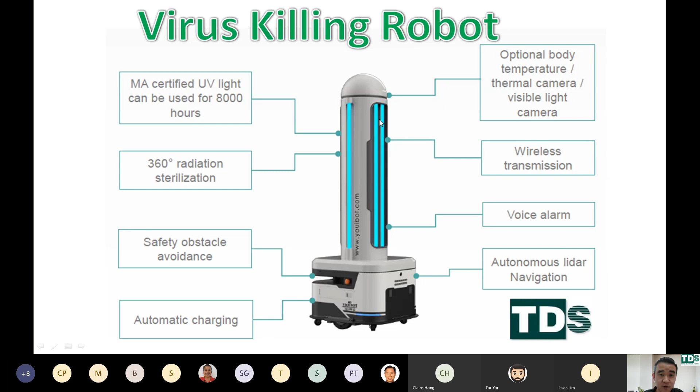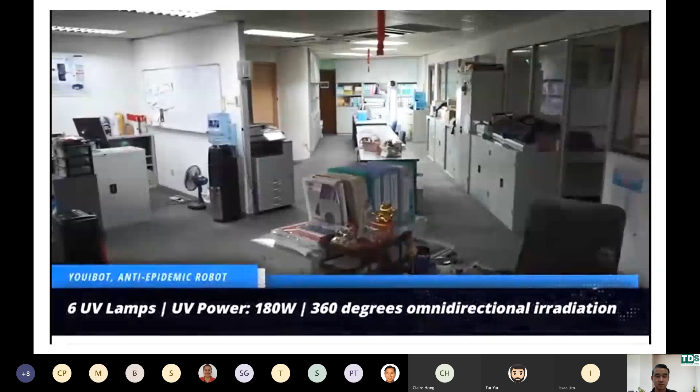UVC is a proven disinfectant against the COVID-19 virus. Introducing Youibot, an anti-epidemic robot. Disinfecting your office after hours without the need for human supervision. Scanning temperature of employees during office hours. With 6 UV lamps and a UV power of 180 watts, Youibot does 360 degree omnidirectional irradiation. Using shortwave UVC, Youibot is capable of destroying viruses' DNA and RNA in just minutes. Contact us for more information.

Flexy is a remote access device with data communication. It helps you connect your industrial equipment, collect the data, and send it to your IoT application through the internet - not only in your local network, but anytime, anywhere, because it's a remote connection through our Talk2M cloud, securely.

So where is VPN? In this example, you are in the office. You can connect to your HMI or PLC from your PC, tablet, or mobile directly because you are in the same network, same place.

If you are not in the same network as your HMI or PLC - let's say you are overseas, at home, or at a branch office - you cannot connect to your HMI and PLC, the devices in your local office. So VPN is the solution for that.

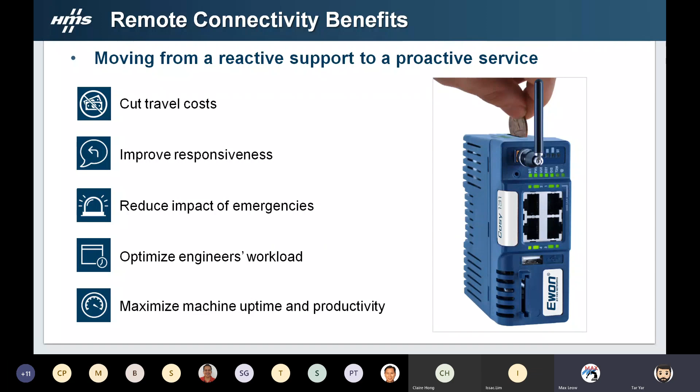Flexy includes a full VPN connectivity solution with the Talk2M VPN service. When we talk about VPN, remote access, or cloud, we understand that security is the main concern. Security is our first priority.

For this, Talk2M security is regularly audited and certified by third-party organizations. We have ISO certification, which shows that Talk2M is managed properly by HMS, in a very professional and secure way.

The Ewon gateway establishes a secure outbound connection through TCP port 443, which is the same port that you might use to check your bank account or your emails.

Therefore, no firewall setting is required to change, because this port is usually already open in the firewall.

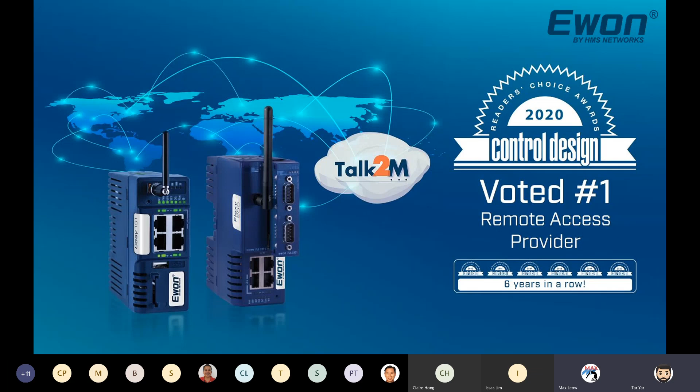To summarize, Flexy is a VPN router for remote access. So all the features that I have mentioned here before can be used anytime, anywhere, not only in your local network or local office. And lastly, we are proud to mention that Ewon devices are award-winning and certified remote access devices in the world.

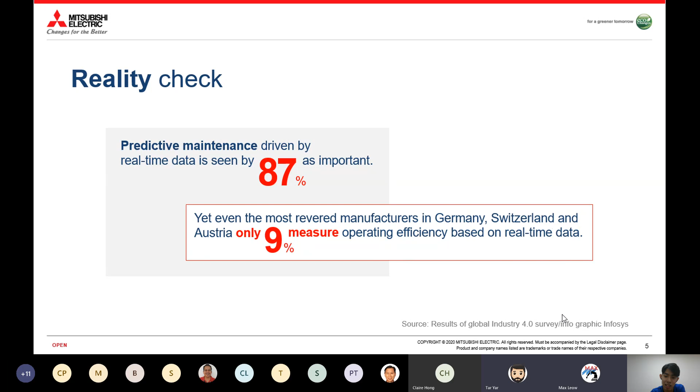For predictive maintenance, statistics also show that 87% of people think real-time data is very important, but only 9% can actually collect and manage real-time data on their factory floor. This data is from Central Europe, and even in Japan, there is less than 30% of manufacturers who can really see what is happening in their factory in real time.

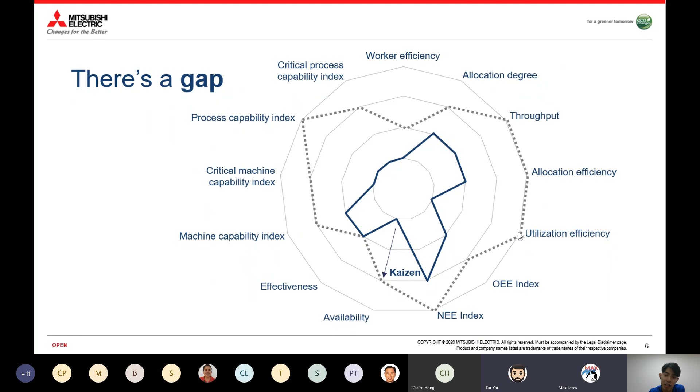From this circle chart here, we can see that the solid line is actually the reality, and the dotted line is the expectation. There was always a very big gap between where we are and where we want to get. The shift from reality towards our expectation has to be done step by step. Various aspects have to be considered when putting in this program, in terms of how we can increase the throughput, how we improve the OEE, and how we can improve efficiencies.

Let us go through some struggles from our customers. These are some of our real case studies previously. Firstly, some of our customers previously always said that they want to build a new Industry 4.0 production line.

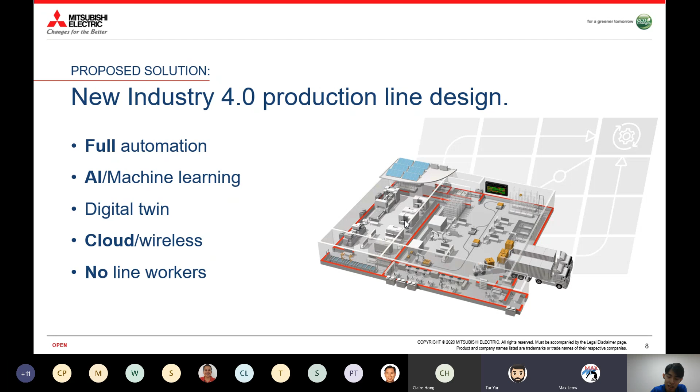They always come up with terms like they want to build a full automation production line with AI, machine learning, digital twins, cloud computing technology. They are making a lot of bombastic terms. And to tell you the truth, when all this technology is implemented, there will always be a lot of problems, and those proposals will be rejected.

Why? It's because there is very high cost and low ROI. It probably takes 3 to 5 times what the boss was predicting, and it's a very tough job. The first time as a manager, he's talking to a lot of people he has never talked with before, and he needs to speak with IT vendors for software, cloud computing, networking, data scientists, and all of that actually costs a lot.

It's reasonable, but very difficult. If you look at a production line that's extremely complex, the calculation of ROI is also very, very difficult. How much can we really expect if we implement this improvement plan? So at the end, everything gets rejected.

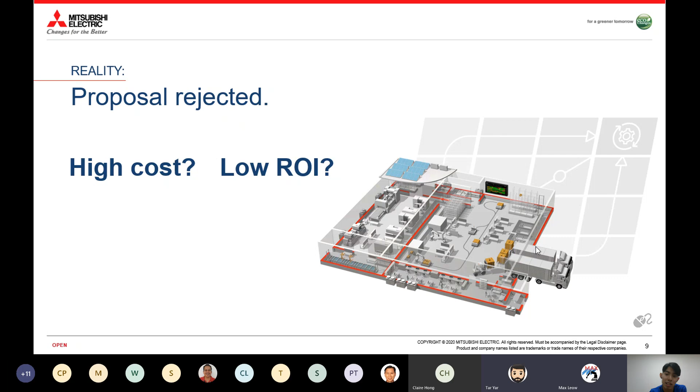Then another case study is where the manager ordered the factory staff to do a data analytics project using AI. So when the factory started working on the injection machine lines, which had a lot of quality issues, they needed to monitor the characteristics of machines like temperature, electric currents, and motor data, to see when the machine is going bad and starting to produce bad quality parts.

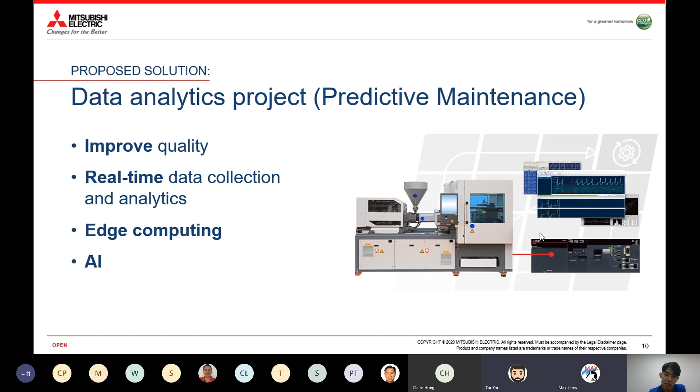They put an edge computer on the machines to collect data in real time. As it is a very fast machine, they gathered a lot of data, a huge database being collected, and they hired a data scientist on a project basis to see if they could use the data to find out what the problem was. So the data scientists looked at the data, tried to find some correlation, tried to find some trend, and did some testing with the actual machine.

At the end, they can only predict 50% of the time when the machine would fail. But 50% prediction is considered quite low, which means another 50% they can't really predict the failure, and it will cause the failed product being manufactured. So at the end, this kind of accuracy of prediction is not good.

And they spend a few months, 3 to 6 months on this project using a lot of money. Then they need to start again to collect more data to improve the accuracy. And the next result is only 10% improvement. So overall, it's only 60% prediction rate. With this prediction rate, it's actually not doing much improvement, but at the same time, it costs a lot of time of the engineers, the cost, and the salary for the data scientists.

So at the end, everything has to be ended, project postponed. Then they rather spend the costs for the engineer to improve the productivity using more traditional methods.

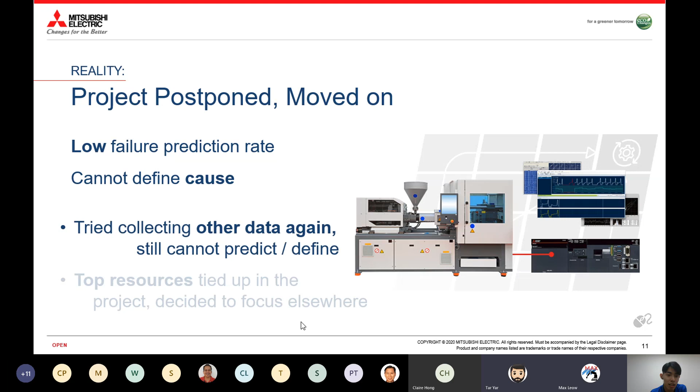And for this IIoT implementation, there are a lot of different failures. Everyone said that IoT is easy and compatible with all machinery, but factory automation is a very complicated process. It's easy to say you want to put an additional sensor as a counter, but where to put the sensor and how to wire it is not that easy. Programming is also required as well.

A lot of people start energy saving projects, but at the end, they just get all the nice screens with histograms, pie charts, but don't really save any energy. They just find out how much energy they are using, and the overall view is like a very sophisticated and bombastic visualization to feel that, wow, we are very advanced. And everyone talks about data analytics, but such cases as I told you, it's not magic.

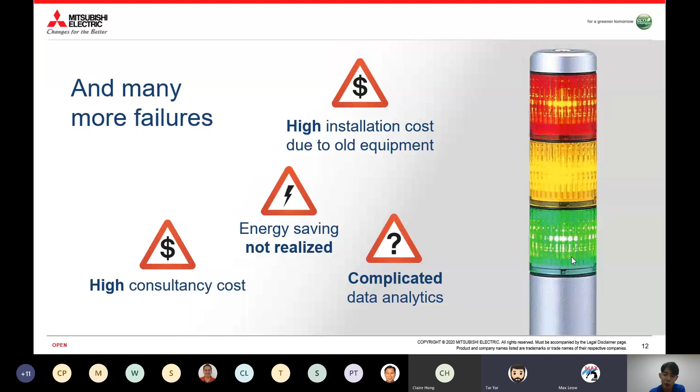We have been trying to solve this problem for ages and never got the answer. Just because you pay money for AI and a data scientist doesn't mean that you will get the return. So basically, these are the lessons learned throughout our experience dealing with different small SME corporations or even MNCs.

So we can dream big, but we always start small. I'm not saying that IIoT is a bad idea. We are firm believers of technology that it will change the way we produce things. And this is why our company has been continuing investing in IIoT e-factory for more than 17 years. And it is always important to dream big, to have a master idea of what you want to do in the future. And your factory will become what you dream of in a step-by-step manner.

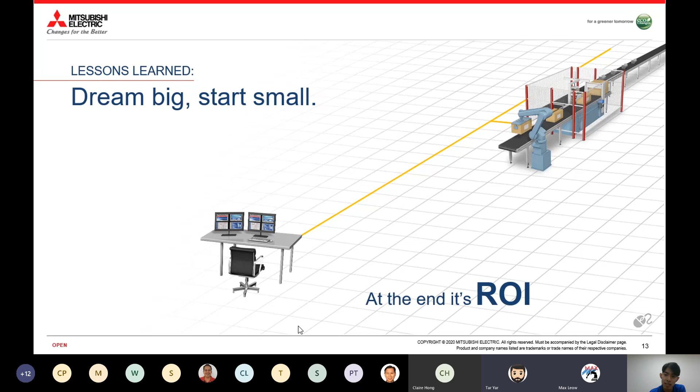So next, simple KPI. One thing that is also very important is to have everyone agree on the output of the IIoT project that you are working on. So many times I have seen management and engineers disagree on the result of a project. Sometimes the thing that management level sees and the engineer level sees is totally different.

Then when you start a project, always set a KPI that everyone agrees on and keep it very simple: where, what level, and what direction. Always make your objective clear so that you can set your direction and also prepare the necessary resources for it.

So I have talked a lot about IIoT, but next I would also show you SMKL, Smart Manufacturing Kaizen Level. This model is implemented and developed by Mitsubishi Electric in Japan, and it's the KPI we use for IIoT in manufacturing. This is not a shortcut for going straight to a totally perfect IoT or Industry 4.0 factory. Everything goes in steps, and this is the map that we use to guide us through.

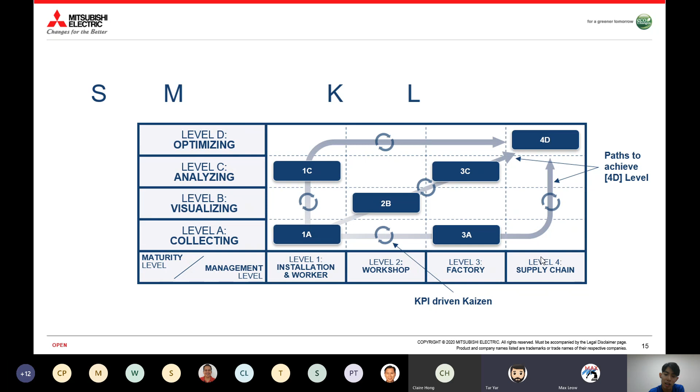And we have what we call Kaizen level and Kaizen areas. The Japanese word is actually 改善, and I will explain after this. The key point is mapping and sharing within your organization where your area is, where you want to go, and defining your KPI.

For this KPI, for this SMKL, there's quite an important term that we are focusing on, which is the maturity level. The maturity level is basically divided into 4 stages: collect, visualize, analyze, and optimize.

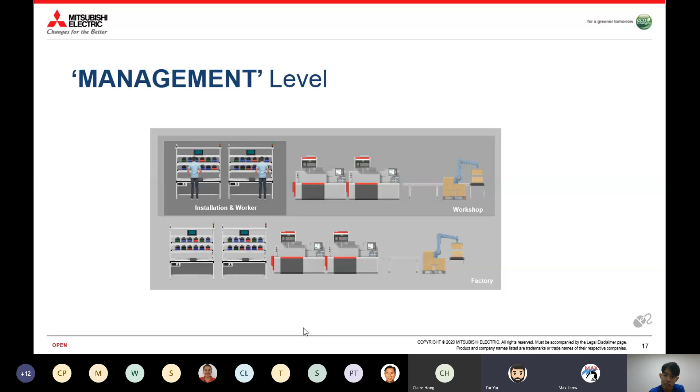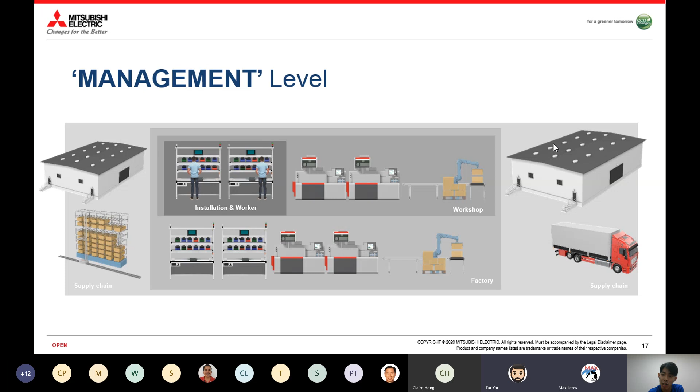And another thing is the management level. The management level here also has 4 levels, from installation, workers, workshop, factory level, to the supply chain level. So vertically it goes from collecting, visualizing, analyzing, and up to optimizing. And the horizontal level is actually how huge or how small the plan can be, from workshop level up to the supply chain level.

And let's say this is a very simple example of the SMKL model that we've implemented previously in our Japan assembly line.

This is a sample implemented in an assembly line, but the journey might be different in case of energy saving. First, in a factory, it's important to understand where you are using the most energy. Therefore, you would first take a big approach, trying to find out which production line is using the most energy. But finding out which production line uses the most energy will not save you any energy.

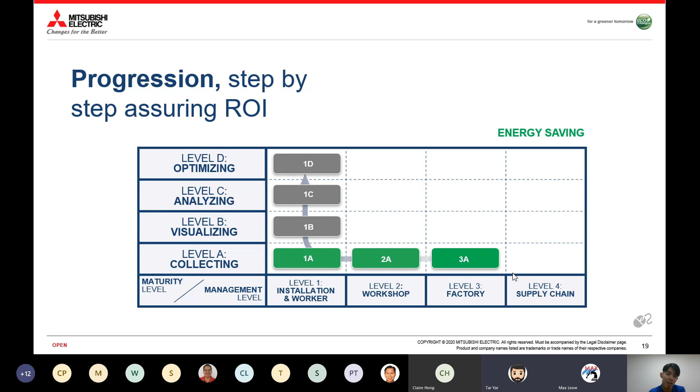Another important aspect of SMKL is you should look at where you want to reach and also understand what knowledge your staff will need. In order to do this project, you will need a skill set outside of automation, knowledge about edge computing, AI, networking, cloud, and of course with connectivity always comes the issue of security as well.

Unfortunately, issues with AI and cloud are not only an external issue now. With technology developing, I'm sure that AI and cloud will come down to PLC, network, and sensor level as well. So you might need to start preparing your engineers, your staff, for the age of IIoT implementations.

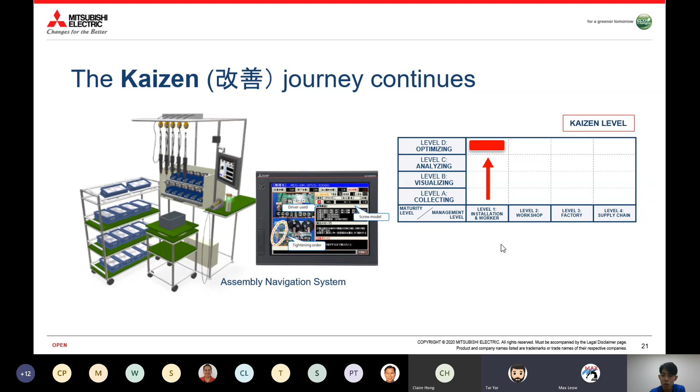The journey is not an easy one, but as a manufacturer that started a little faster than most companies, we wanted to share what Mitsubishi Electric has learned in the past. If you are interested, we do have a package solution to guide you step by step throughout the SMKL model, assisting you to reach the level you would like to reach, up to the more sophisticated system covering the entire production line and further.

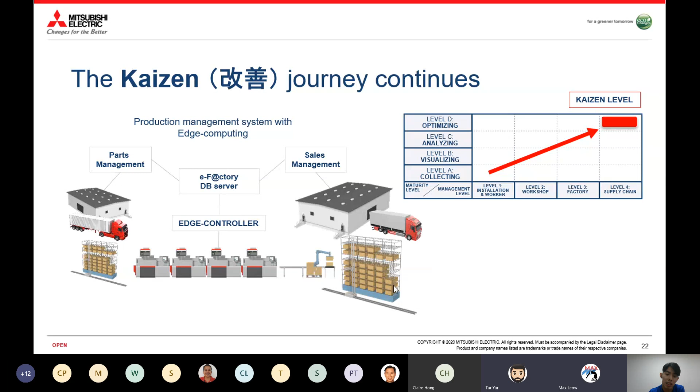Next, I would like to go into some real life examples as we and other companies use the SMKL KPI in real life.

So the first one is an application about a manual motor assembly cell. In this case, what we wanted to improve is the efficiency of assembling a motor. Typically, when we assemble a motor, we would use drawing manuals from files and were not even monitoring the assembly line. Overall, we were just counting how many motors we made at the end of the day.

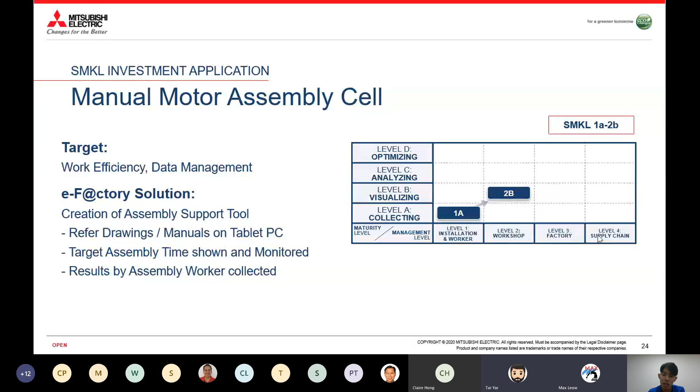So our proposal was to install IIoT and utilize a tablet to collect data to raise efficiency. This is the actual screen, and you can see now the worker doesn't have to use paper anymore. He just follows the instruction on the screen when assembling. In addition, all the processes are listed, as well as how much time it took to complete each task.

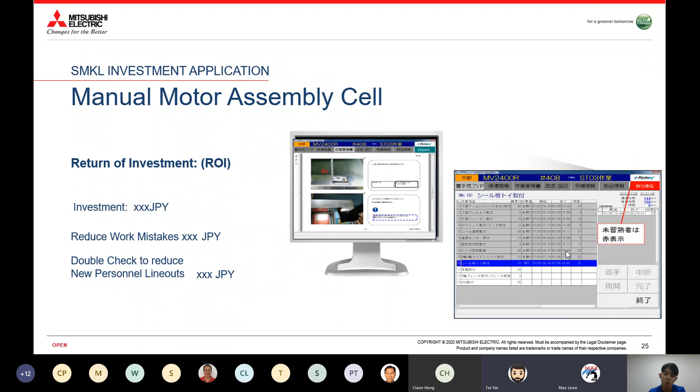This is being recorded. When submitting the instruction, we can also calculate how much it would cost and how much we expected to benefit from the project based on past line-out or working mistakes. So it was an easy decision for the management to make, as the ROI was easy.

Another sample project we did is about the final inspection process when we make electrical discharge wire cutting machines. Historically, for the final inspection, we were doing this by paper checking, checklist style, and we wanted to change this to electronic format.

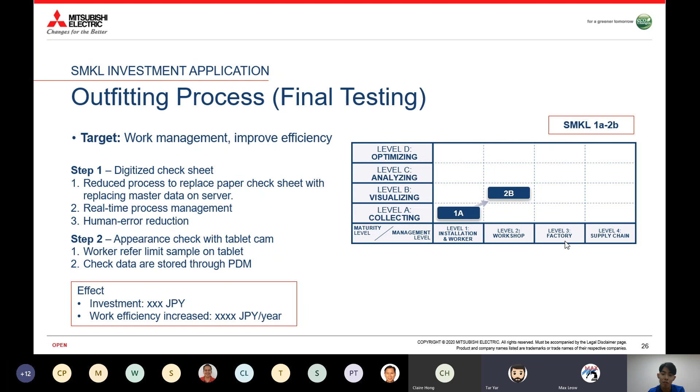This provided multiple benefits, as not only were we sure that the worker completed all the tests during testing, we were also able to use this as a quality database and save all photo data together. And when we ship out the products, if we have a quality issue, we can easily go back to this quality database and find out if we did have any issue in manufacturing.

Overall, KPI ROI is the thing that everyone, every level, should agree on when implementing an IIoT project, and also have to forecast and foresee what stepping stones you might be facing throughout the process, to map and plan the action and check everything using this SMKL model.

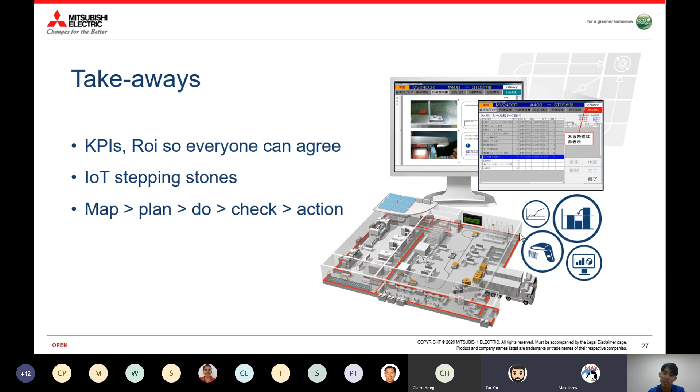And this SMKL is not only a Mitsubishi Electric initiative. We are now working with companies like Hitachi, Dassault Systèmes in a working group, and also planning to propose this to ISO and IEC for standardization.

And this is just a small part of introduction. We are preparing specific KPI, proposal worksheet, and flow sheets for this SMKL model. For those who are interested, can let us know. We actually have a white paper with a detailed explanation of this SMKL model.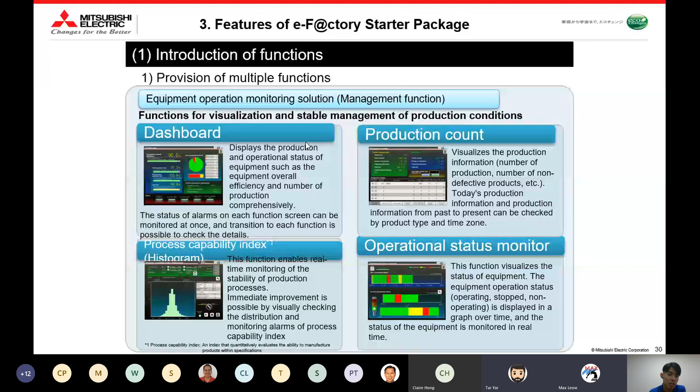There's including hardware PLC, HMI, and also the software: ladder programming for PLC and HMI design page for our user to use. The visualization includes dashboarding, production counts, process capability index, operational status monitors, and for maintenance wise, there is cycle time monitor, error inspections, and also some additional functions, which are equipment trouble Pareto charts, control charts.

And loss time analysis. So with this, I will show you a very brief demo on the actual software. Give me a second.

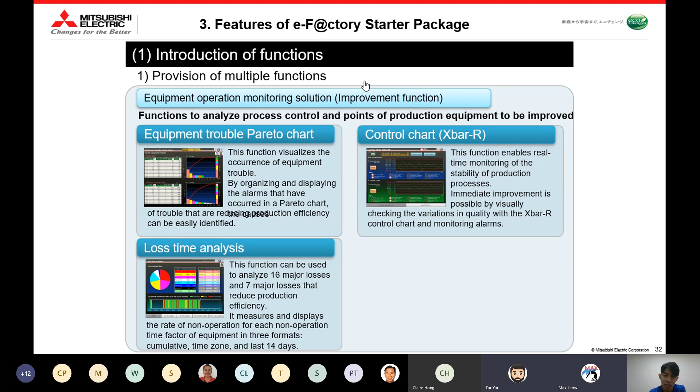Hi, can you see my GT Simulator? Yes, we can see. Okay, so this is the standard template that we provided in our e-F@ctory starter package. There is dashboarding, production counting, all those different types of pages that our Japan site has developed for our user to use as a standard template.

So give me a second. Okay, so for the dashboarding part, these are all the standard interfaces or standard visuals that customers normally use for all OEE calculations or production count calculations.

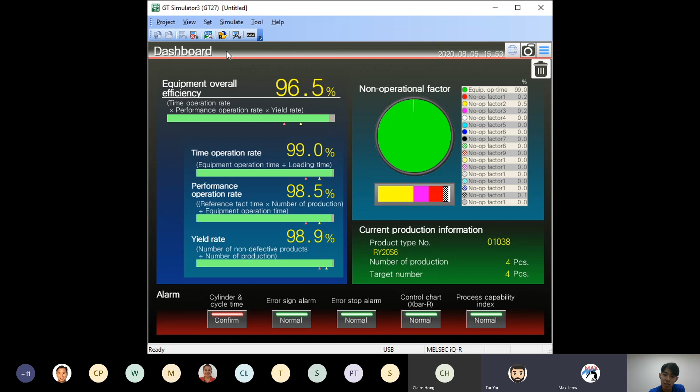So let's say this pie chart here is actually the non-operational factor. If there is any error occurred on these machines, the counter will slowly build up, to let you know how efficient the machine is.

And also there is some product counting, product OK, you can see that the number of production increases. If the NG product increases, the overall efficiency, the operating rate, the yield rate, all will be calculated automatically.

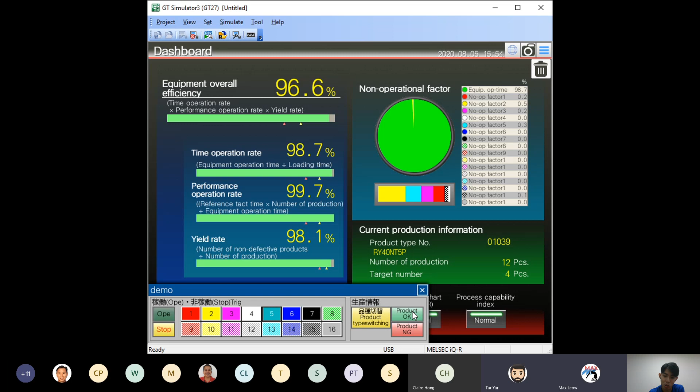Other than this dashboarding, for production count, you can see that there are different types of products, different SKUs, which our users can modify according to their factory production lines. And also...

You can handle a lot of different types of products here. It will calculate everything automatically. What you need to do is just link the sensor data to the PLC level.

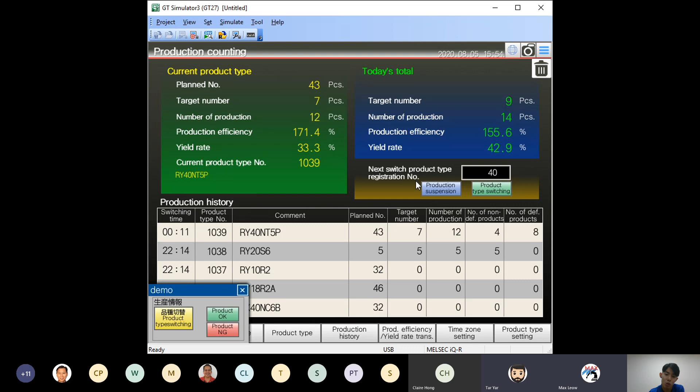And also there is another thing that we call the process capability index. Give me a second, let me run the demo data.

Okay, so this process capability index, basically, there is a histogram that will calculate the product quality of your manufacturing parts. Because I'm demoing good product data now, everything is green - this CPK value, CPU value, CPL value.

And the advantage of this template is that you don't need to know how to calculate all these things. The standard template in our PLC ladder program will calculate it automatically and come out with all these results.

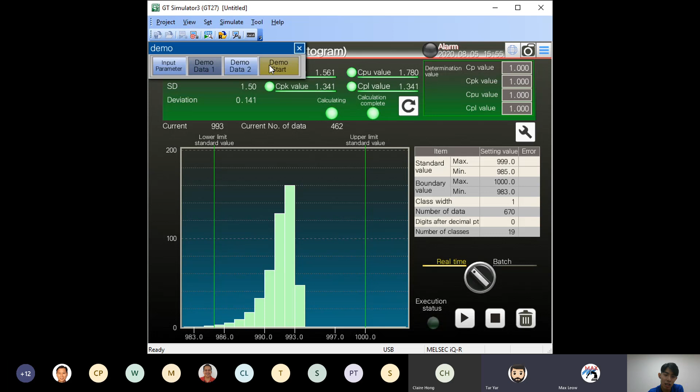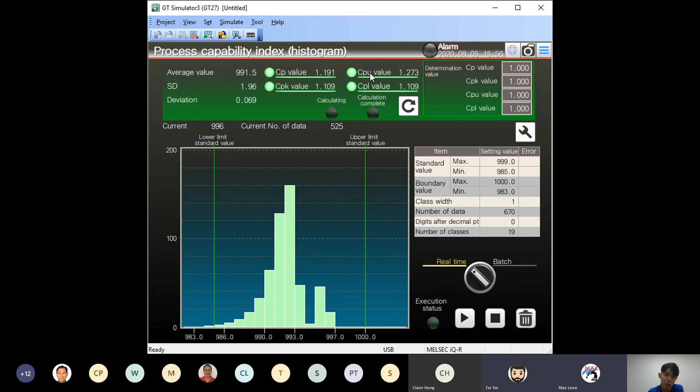Then if let's say I run the NG data, this is the NG data where you can see all this CPU value is actually slowly falling below 1, and an error will be triggered if it falls below 1.

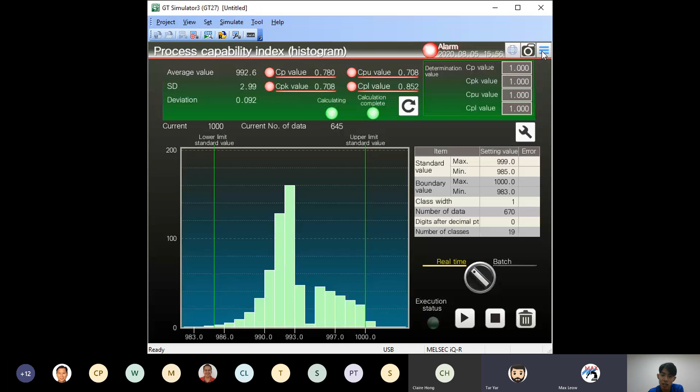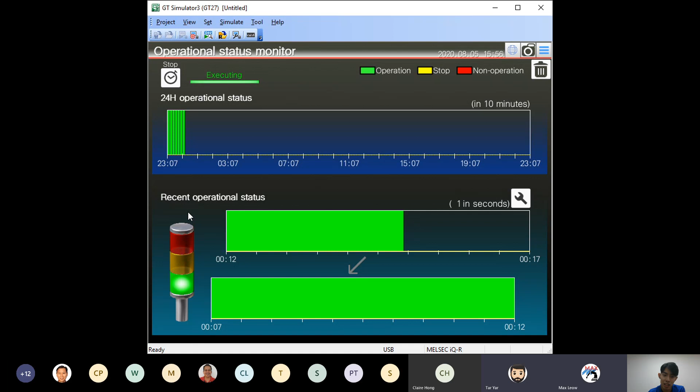And the next one is actually the operational status monitor. This is quite straightforward - most factories currently only use the tower light for visualization. Here you are able to see how long your machine is in stop status in a more visual way that includes bar charts.

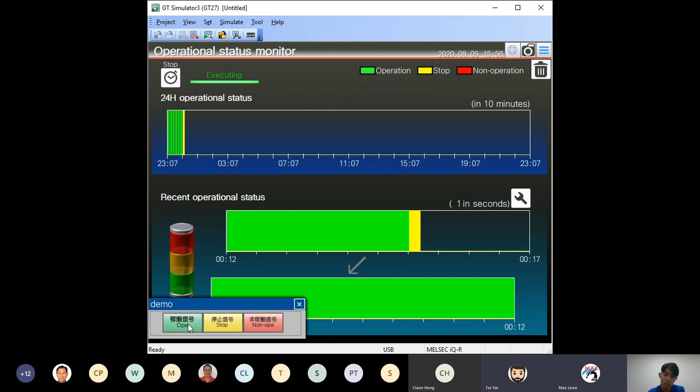How long your machine stops, how long your machine is operating, and also how long your machine is in idle or non-operating status. So all of this is a standard template, but you are able to make modifications to suit your actual production lines.

So far, that's all for my presentation. I would pass the mic back to Max.